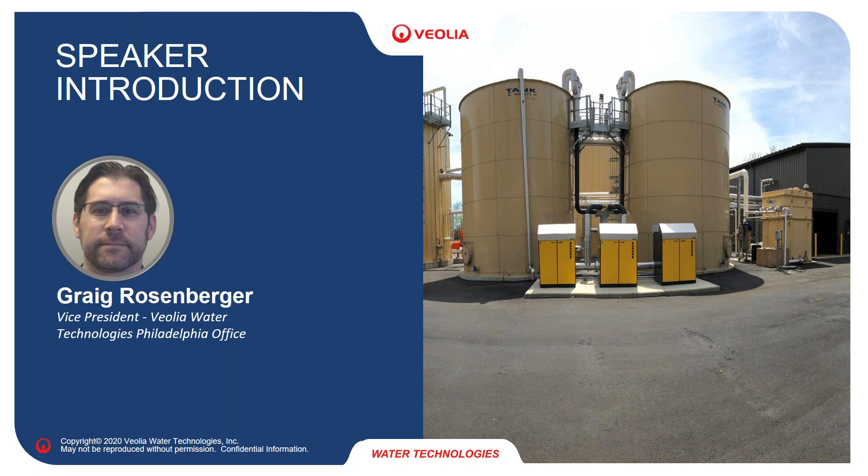Hello, everybody. As TJ mentioned, my name is Graig Rosenberger, and I've been working in the food and beverage industry and the wastewater side for over 20 years, and I'm happy to give this webinar series today from my lovely bedroom, probably like a lot of you guys are at home in your dens or bedrooms, or at the work from home situation going on right now.

From the agenda today, we're going to hit a couple core topics. We'll have a brief look at understanding some food and beverage wastewater, some terms, looking at a little bit of the technology. Then we're going to go into what are some of the key wastewater project drivers that we're seeing out there and why people are actually putting in wastewater projects. We're going to look at different types of technology out there, primary treatment, biological treatment, anaerobic and aerobic systems, membrane technologies. We're going to look at an interesting small evaporator technology for point source treatment.

We're going to look at some case studies. Where are your contemporaries applying these technologies and what do their projects look like? And then we're going to finish up by looking at some things. If you're thinking about a wastewater project, what are some things that you would have to think about, some things you should do to help the technology supplier better provide you with the best solution available.

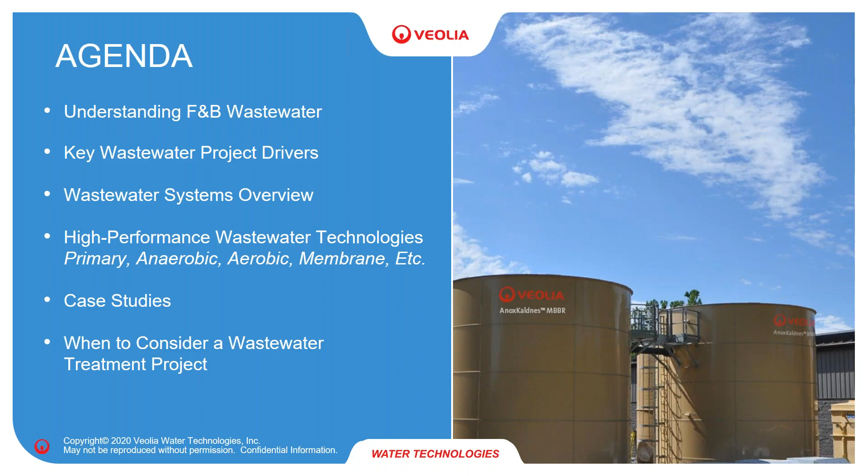To start off, when we look at wastewater treatment, you'll find, if you don't know already, there are a tremendous amount of acronyms and terms that we use out there. We just sort of say them right off the bat, assuming that everybody knows what they are. We found through some of the feedback that sometimes people don't know all these terms that we're throwing around. So we just have a little glossary here to start with. You'll see some of the key terms here that are used all the time.

COD, BOD, being the chemical oxygen or biochemical oxygen demand, really what measures the strength of your wastewater. TSS, total suspended solids, pretty self-explanatory, the solids in your wastewater. You have a lot of different types of technology that all have acronyms. UASB, EGSB are different anaerobic technologies. DAF for dissolved air flotation.

MBR for membrane bioreactors. MBBR, and a lot of people confuse MBR and MBBR, the difference between a membrane bioreactor and a moving bed biofilm reactor. And for a lot of you, especially in the dairy industry or in the meat process industry, FOG: fats, oils, and grease. So here's a couple of the key wastewater terms. We use those a lot in the wastewater industry.

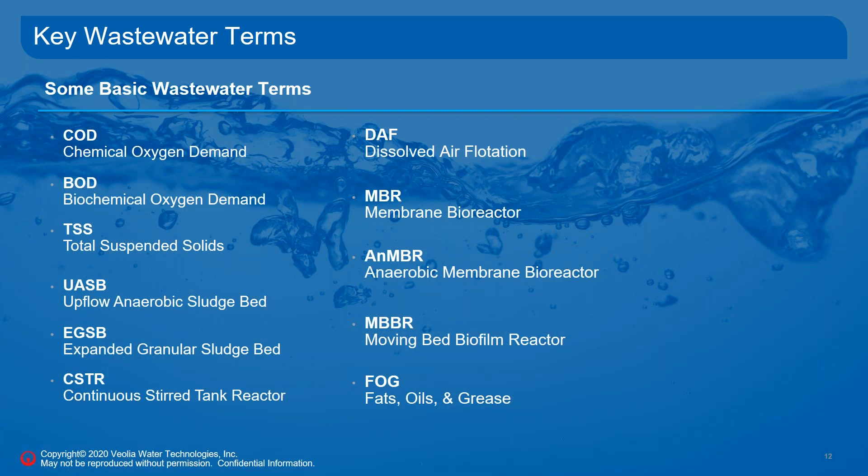When we think about food and beverage wastewater, what does that consist of? A lot of sugars, carbohydrates, fats and greases, proteins, ammonia, other compounds. These are the things that a lot of times are going to be in your raw wastewater that create some of those COD, BOD, TSSs. Some of the unique challenges in the food and beverage industry: pH swings. When you do CIPs, obviously a lot of times you come down with extremely high pHs that need to be understood. Temperature. Are you coming down hot? Are you coming down cold?

Biological wastewater treatment is very dependent on temperature. Anaerobic treatment likes hotter temperatures around body temperature, 98.6, 99 Fahrenheit. Aerobic systems can run at a wider range of temperature. Variability, there's a lot of variability, especially for batch production facilities, in the strength and the flow of the wastewater that comes down. Seasonality, look at some of the vegetable producers, they have huge production in certain parts of the season and very little in other parts of the season.

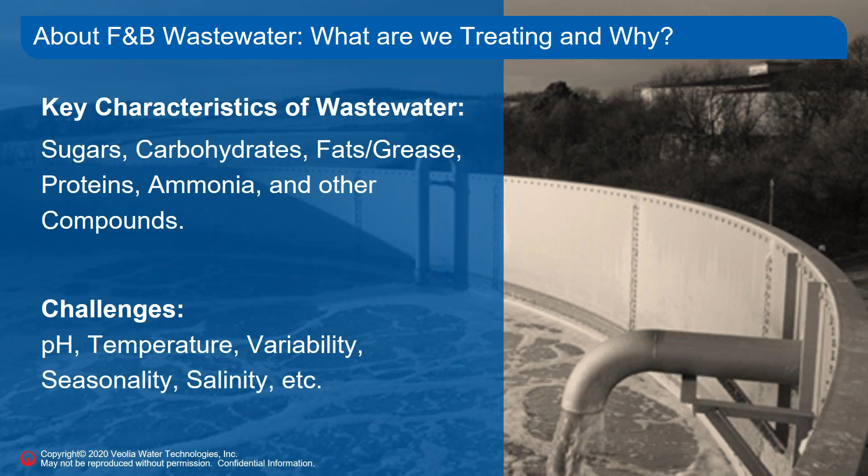Salinity, what is your salt content? What is your chloride content? A lot of times that comes into play when we look at materials of construction. If you have high chlorides, potentially that could make stainless steel an issue. So there's a lot of unique challenges in the food and beverage industry and across different portions of that industry that we have to take into account.

Why do we do this in the end? Why do we treat wastewater? Not to get on the soapbox a little bit, but obviously it needs to be treated because it has an oxygen demand that if you just put it directly into a receiving body, the bacteria would eat that oxygen in the water, and then it would kill the fish. It would cause other detrimental issues.

A lot of N and P eventually go into large bodies, like the Chesapeake or Delaware bays. You could have algae blooms or lake eutrophication around your nutrients. So there's a lot of reasons why we need to treat our wastewater, and there's ever-evolving targets and regulations that need to be hit as those limits become more and more strict over time.

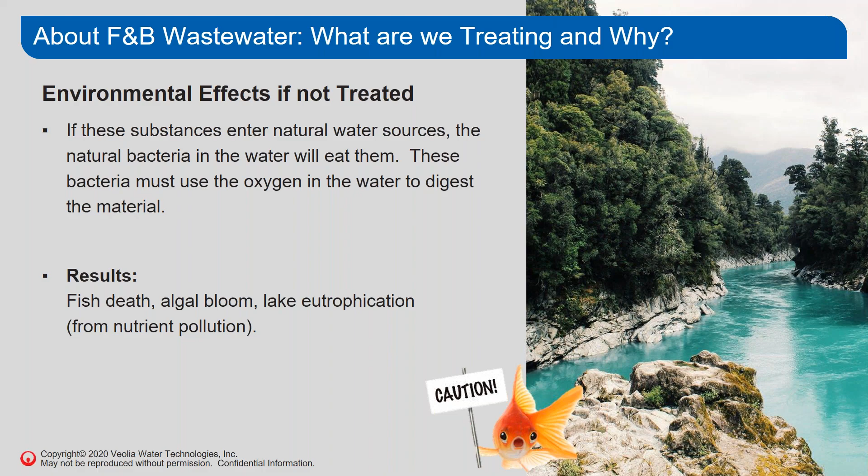So what are some of the key project drivers that drive the food and beverage industry to do projects? I would say number one typically is sewer surcharges and sewer violations, notice of violations. If you're not going direct stream discharge, most food and beverage facilities still put their wastewater into a sewer system. You have to pay money for that. You might have limits for that. So a lot of times the reason people are looking at it is to have an ROI project to reduce your sewer surcharges, or the sewer authority through notice of violations is forcing you to put in a pre-treatment plant.

Corporate sustainability: there's a lot of large firms out there that have corporate sustainability efforts that are requiring some level of pre-treatment before a sewer, or they're looking at water reuse type of situations. Facility expansion is always a big one. You're putting in an expansion project, you're increasing your production capacity by 25, 50, 75%, and the sewer authority or your existing wastewater treatment plant cannot handle it. So you need to include wastewater treatment plant expansion in the total facility expansion.

And another thing is future proofing. There are some clients out there that we are seeing that say, we're going to do a wastewater project, we don't want to do it just for today. We want to put in a project that's going to last 10, 15, 20 years. So we have some more people now looking at, okay, what are my expansion plans over time, recognizing that it might cost a little bit more right now, but to increase the volume of a tank or a pump is very small compared to adding a second whole tank or pump in the future.

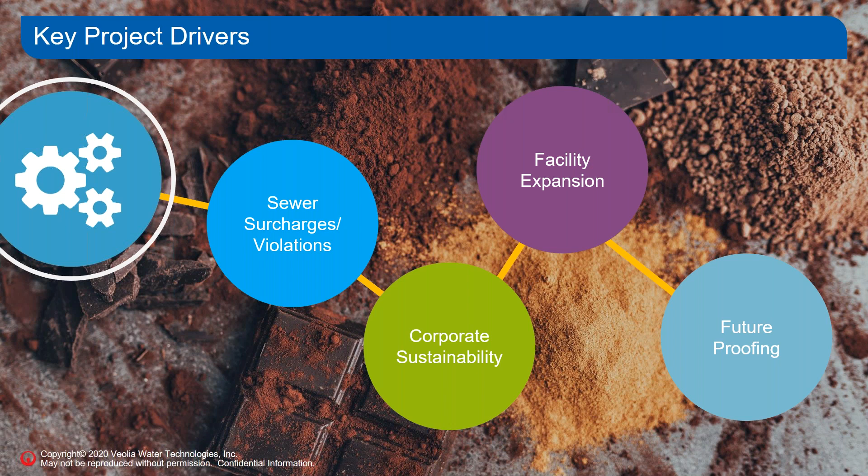So when we look at the first drivers, we're really reducing sewer surcharges. How is that going to happen? What do we look at? What are we looking to do? And most of the time people are paying on TSS, FOG and BOD surcharges. Almost everybody pays on flow, strength of wastewater with BOD, and solids of wastewater with TSS and FOG. So we're looking to reduce that level of pollution, or sometimes even reduce the flow if we can.

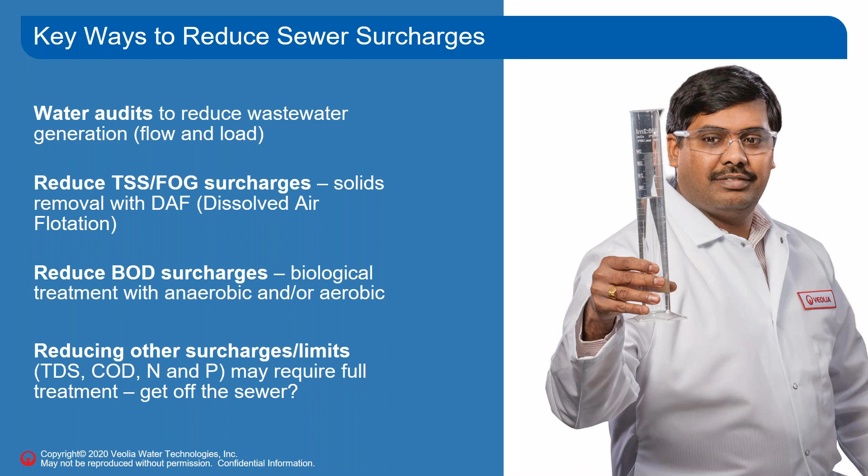And then the secondary one is if you have any nutrients. There's some people out there that do have nitrogen and phosphorus requirements, even some now that are starting to have dissolved solids requirements. How do we reduce those? So when we look at sewer surcharges, you're typically looking at what your sewer bill looks like. What are you being charged on, so we can figure out how much money could be saved. Eventually the accountants get hold of it and want to look at an ROI calculation.

So what technologies do we use to reduce pollution in the wastewater, reduce those CODs, those TSSs, correct for the pH, etc.? So when you look at wastewater treatment, some more terms you'll hear. You typically look at 3 types of treatment. You'll hear about primary treatment, which is typically equalization, pH neutralization. Maybe you could consider FOG or TSS removal, screening. That's what you typically consider primary treatment.

Secondary treatment, typically you start to talk about biological wastewater treatment and large reductions in the BOD or COD of the wastewater. And then you talk about tertiary polishing, sometimes when you need to go to lower levels of phosphorus or lower levels of TSS, or put in even finer screens. And then there's different types of offshoots from that. Sludge handling, if you have a lot of sludge that you can't just truck away.

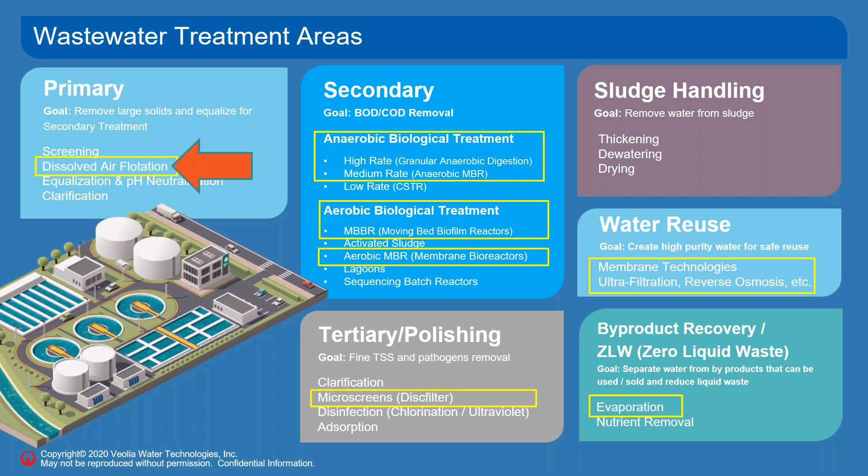Looking at potential water reuse back into a cooling tower, back into the facility. Or even some small plants are looking at zero liquid waste or zero liquid discharge, ZLD type systems. So we're going to start off here with primary treatment. Most people know what equalization and pH is, but if you're looking at dissolved air flotation, that's really around typically FOG and TSS removal.

There's a lot of people that have FOG limits. Typically, maybe that could be 200 ppm, 300 ppm. The sewer authority wants you to reduce that because essentially the FOG goes down the drain, it gets into the pipes, maybe it combines with some cold water somewhere, and you start to create fatbergs, as they're called. If you go online and Google fatberg, you'll see some stuff from London a few years ago. They had fatbergs that were tons and tons large over years and years of time.

So the DAF is a piece of equipment that is used a lot to remove FOG from wastewater and get it down underneath your FOG limit for the sewer. It also has the benefit that all the TSS and all of the BOD associated with that FOG is also removed. It's a technology where you basically inject air into the waste stream. That air, those micro bubbles, float that FOG to the top of the DAF where it is scraped off. And then the clean water in the underflow is your final effluent.

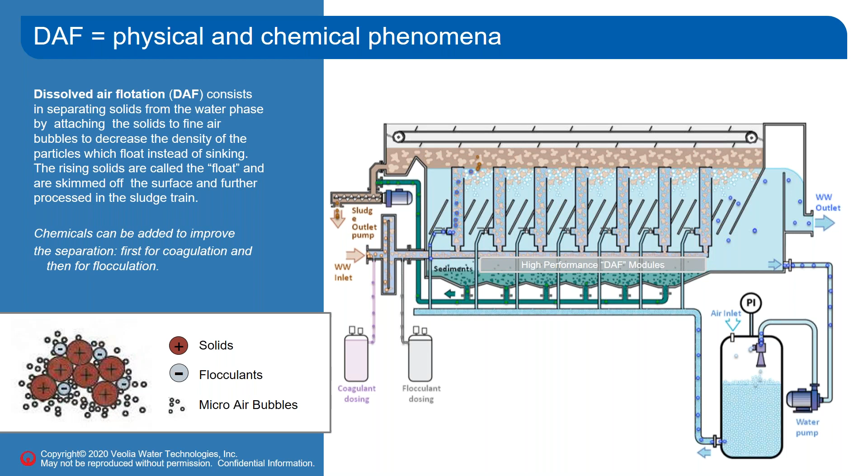Typically, you will use polymer, some type of coagulant, like a ferric chloride, or sometimes another type of polymer, and then a second polymer that will help facilitate that flotation of material. The main advantages you'll see are TSS and FOG removal. With a standard DAF, you would pretty much take 80 to 90% TSS and FOG removal with proper polymer dosing. And this is done, as I said, to prevent a lot of downstream blockages of FOG in downstream sewer piping.

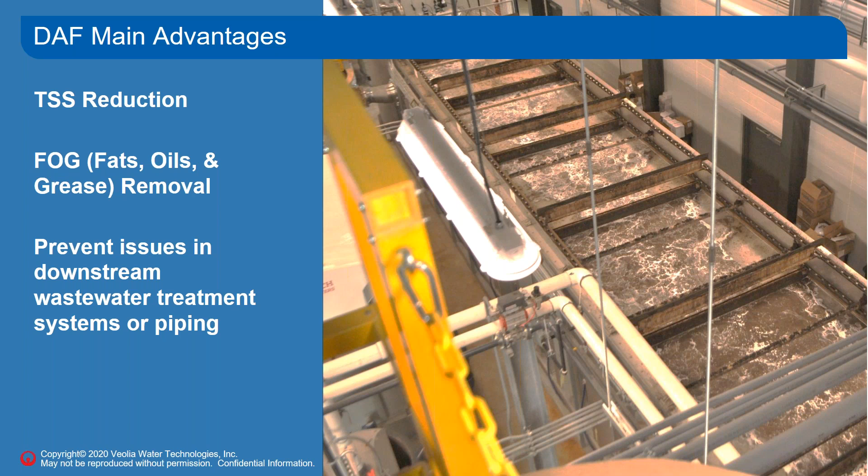If we go now to secondary treatment, there's a couple different types of secondary treatment that we'll look at. We'll start off with my favorite type of treatment, anaerobic wastewater treatment. When you look at anaerobic wastewater treatment, you're typically looking at a couple different types. We call them high rate, medium rate, or low rate. Traditionally in the food and beverage industry, you're talking about high rate and medium rate. Those would be your upflow granular sludge systems, your UASBs and EGSBs. Medium rate is more of your Biobulk CSTR systems.

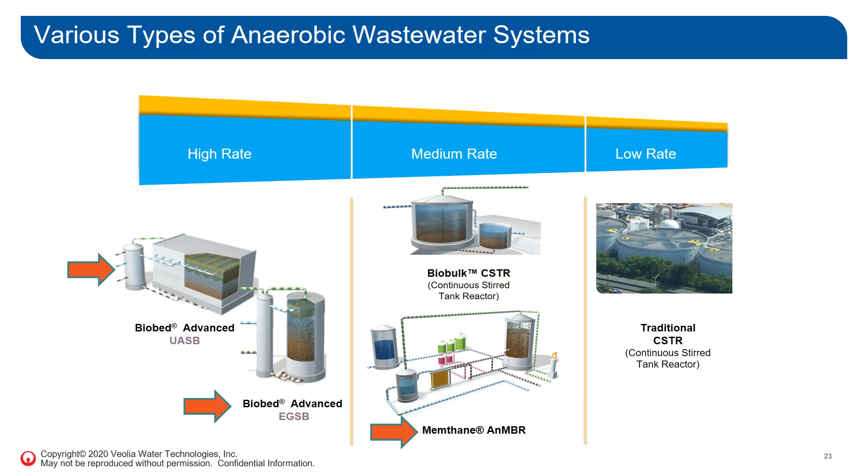The high rate anaerobic technology, granular technology, is a bellwether in food and beverage. Veolia has over 600 of these systems installed worldwide in the food and beverage industry. The UASB system is very common. You'll see it in the dairy industry and the potato industry. And the EGSB system you'll see in most of the other industries. Typically, these types of systems get 80 to 90% BOD removal in a very compact system.

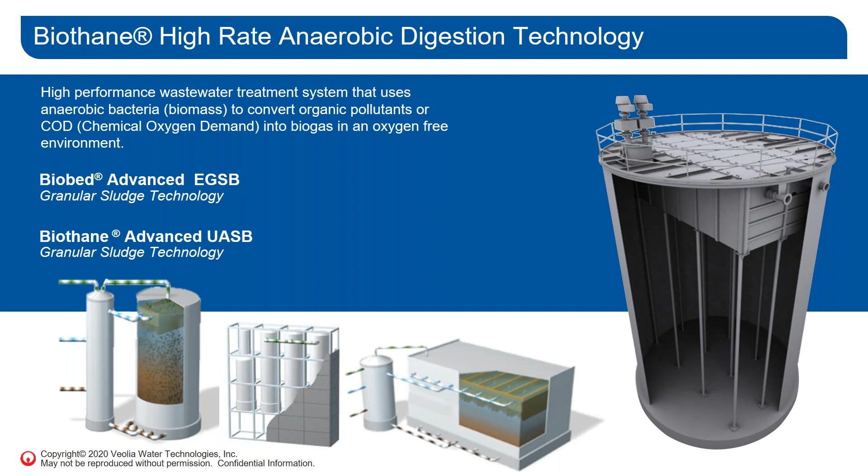They use a granular biomass. It looks like small peas or caviar. You see that initially from a healthy reactor. And the benefit of this system, unlike a lot of aerobic systems where you have a waste product in your sludge produced, is this biomass typically can be sold to other reactors that are starting up or have had problems over time. So you turn a potential liability actually into a product.

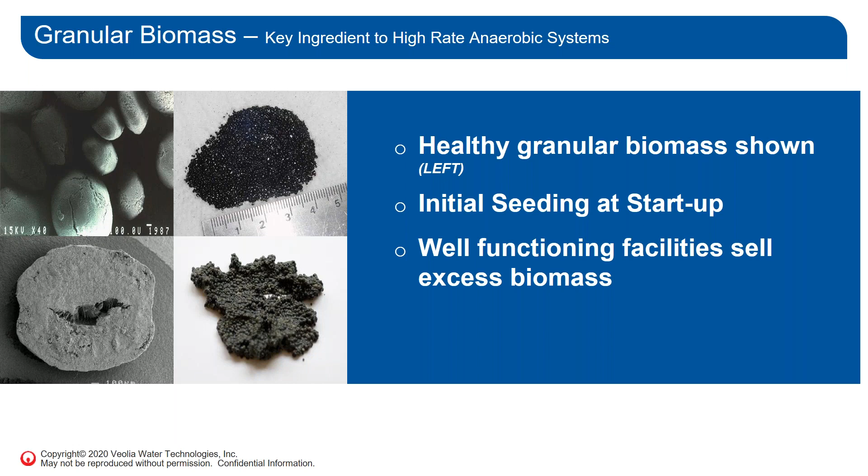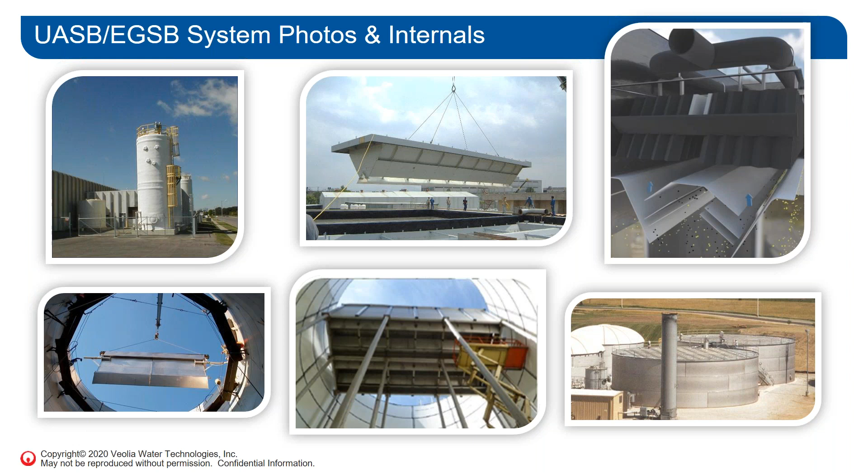The key to the system is the internal separators or three-phase separators. This is where all of the patents and proprietary technology lie for the system. These are shop fabricated to very high quality tolerances, and they are then shipped out to the field and installed in the reactor tank itself.

Another technology out there in the food and beverage industry, especially in the high fat industries, is the Memthane anaerobic MBR technology. The unique part about this technology is it digests fat and TSS. A lot of times if you put a DAF in front, you have fat removal that you have to take into account in your system, having a tanker truck come every couple of days, or depending how large your system is, maybe a few times per day to remove that float. This system actually digests it and then can get that material down to sewer level quality in one step.

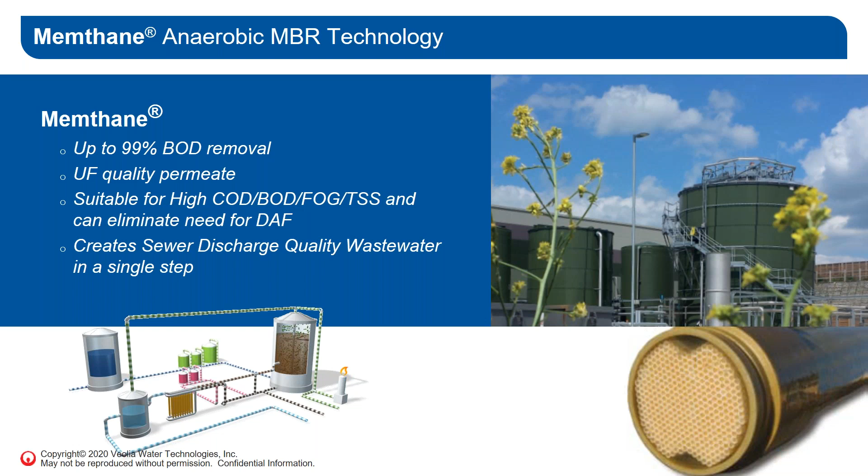Some of the main advantages of anaerobic systems are they have compact designs and sizes. They can be built tall. They run at very high loading rates. So you can get 99% of treatment in a fraction of the footprint that you would need for an aerobic system. They traditionally have much lower operating costs. There are no blowers in the system that need power. And in most instances, biogas is created that can be reused within the production facility to displace natural gas.

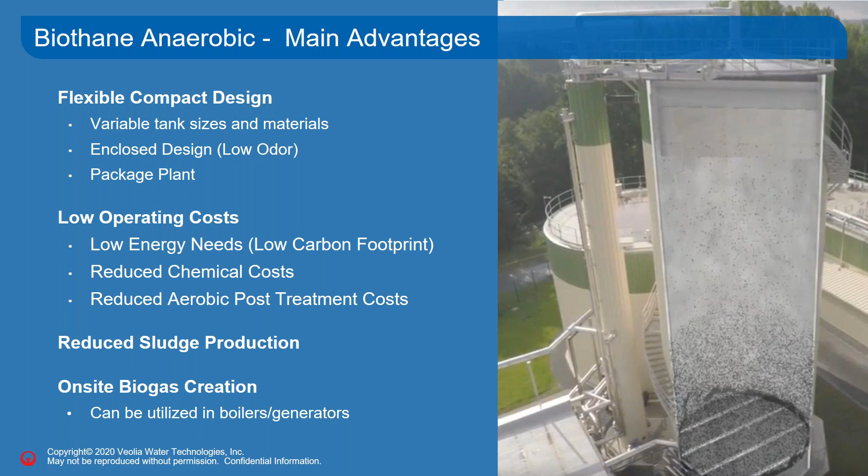And finally, reduced sludge production. In an anaerobic system, only a couple percent of that BOD removal goes to sludge production versus a typical 35 to 50% in an aerobic system. So the amount of sludge that gets produced is much lower. So a lot of operational cost advantages to going with an anaerobic system.

For smaller sized treatment plants, we do have packaged anaerobic systems. These are completely shop fabricated anaerobic reactor tanks. They come with a skid that includes a control panel and the pumping systems. We can shop fabricate the equalization tank. So if you have systems that are smaller in size, a couple 100,000 gallons per day, COD loads that are less than maybe 6 or 7 metric tons of COD per day.

This is a very interesting type of system because it can be built in the shop and installed very quickly. So if you need a fast system out and installed quickly, this one is it. And also, because everything is shop fabricated, it is extremely cost effective.

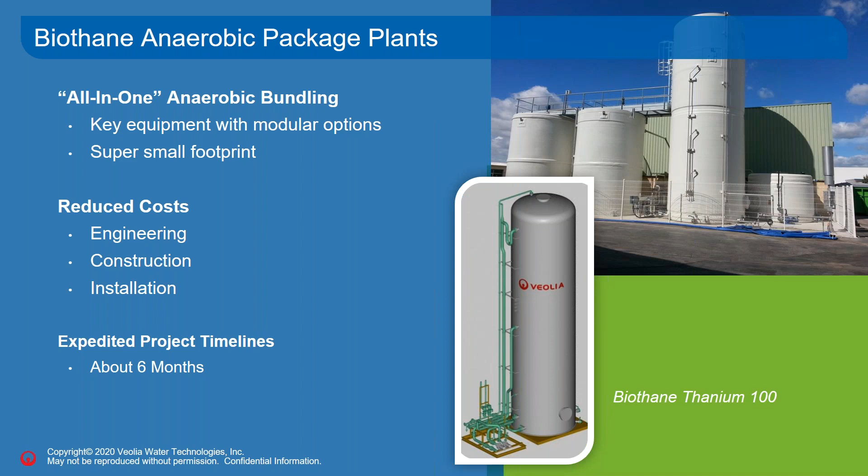If anaerobic treatment is not apropos to your situation because of your influent, or you need very tight tolerances on the sewer discharge, so that you need aerobic biological treatment in back of an anaerobic treatment plant, there's several different ways to do that. First is a conventional activated sludge plant. This is what you see at most municipal facilities. It's been around for a very long time.

Essentially, you have a large aerobic aeration tank where you have your blowers and you blow air up through the wastewater. The aerobic bacteria in there reduce the BOD, COD and TSS in the system. You overflow that into a large gravity clarifier, which basically concentrates the sludge, which you recycle back into the system to keep the sludge concentration in the aerobic system high, and then that clarifier overflow is your effluent.

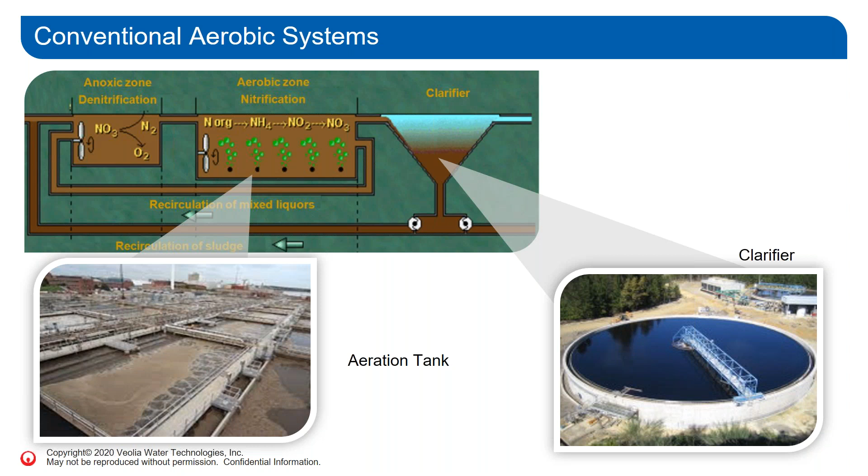And then you have obviously your waste sludge. Whatever you don't recycle back into your aerobic tank is waste sludge that would have to be handled either in a dewatering system or trucked away.

A second type of technology out there, which is much more compact, is the MBBR technology, not to be confused with an MBR technology. MBBR is moving bed biofilm reactor. AnoxKaldnes is the Veolia technology brand name for that. It's been around for nearly 40 years. The interesting thing about this technology is it decouples the clarification from the aerobic system.

So you have a plastic media, it's a biofilm-based technology, as you can see there in your picture. The bacteria actually grow on these small pieces of plastic. So you can load this technology at a much higher loading rate, much smaller footprint, and then you can clarify that with any type of clarifier that fits the system best. It could be a gravity clarifier, a DAF system, or a ballasted clarification system. So it is a more flexible technology in that sense.

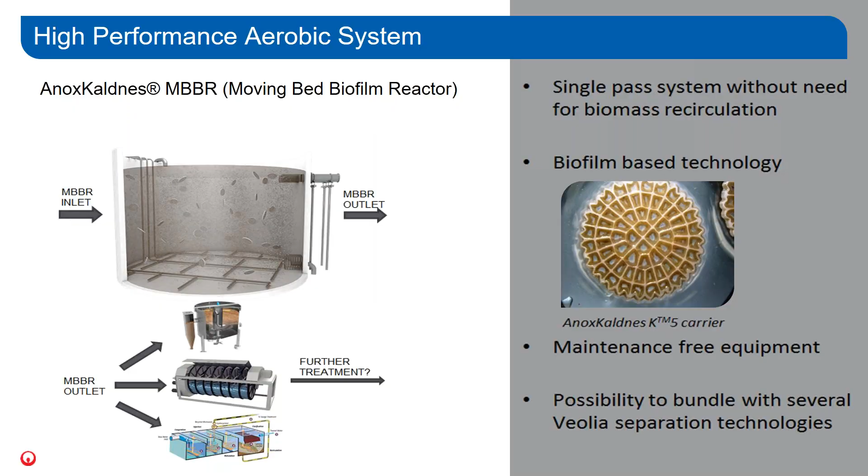The internals to the system are still pretty straightforward. You have an air grid at the bottom of the tank. That air grid is a medium bubble diffuser system. That's one of the advantages with the MBBR. You don't need fine bubble diffusers. You don't have to go in every so many years and change out a whole bunch of discs. It's just a set of metal pipes with holes in it, pretty much.

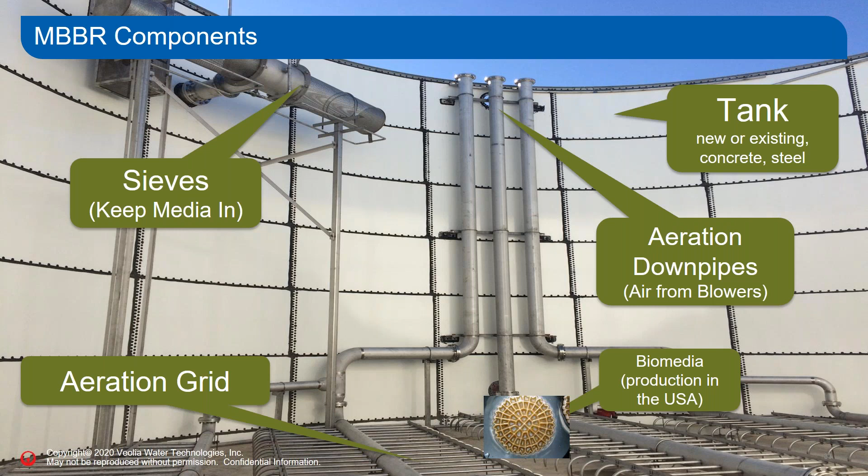You have your media, which is produced up in Wisconsin in the USA. And then you have your sieves. You obviously have media in the tank, and you don't want that media to just overflow out into your downstream piping. So you have some sieves. Really, they're just big cylinders with holes in them to keep the media in the tank. So a pretty straightforward system on the aerobic tank itself.

Here's a picture of the media. It looks like Honeycomb cereal, if you're familiar with that. A lot of technology actually goes into this media to get the proper buoyancy, to get the exact amount of space that you require in between the plastic to make sure you don't grow over everything, so you have the right biofilm thickness, etc. So there's actually a lot of technology that goes into those. They come out to the site in big super sacks that you just dump into the tank.

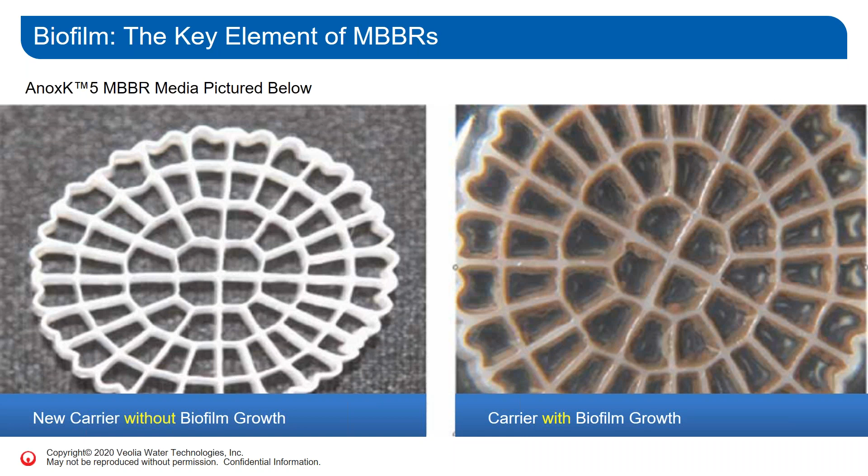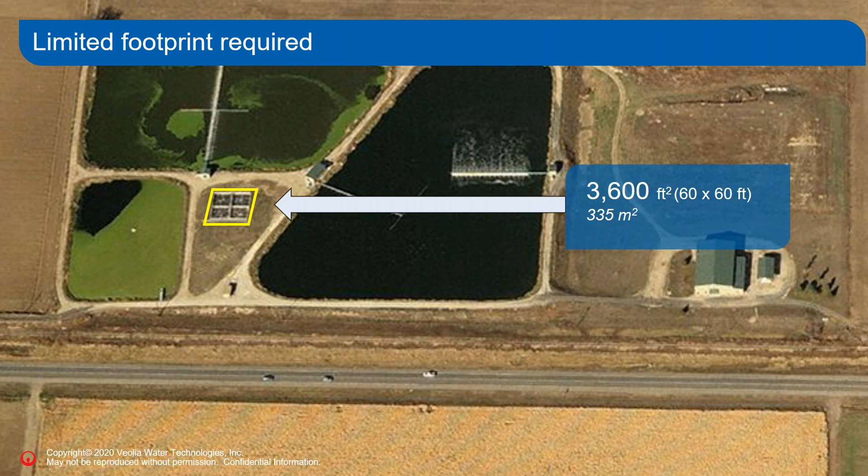Footprint, as I said, is one of the major advantages of this system. It can be run at a very high rate. So if you have a big aerobic lagoon, you can bring this down to a fraction of the size. It is much smaller typically than activated sludge plants too. You can build these tanks a little bit higher as well. So if you have footprint issues, that's a key place that these are installed.

It's also pretty flexible in where you can put it in. In greenfield sites, we can put in an MBBR system as a standalone system. Let's say you have an activated sludge plant already, but your system is overloaded. You can put an MBBR right in front of it just to take off 30, 40, 50% of the load and then just overflow right into your existing activated sludge plant. So it's a real cheap way to gain pre-treatment or to gain expansion into your existing activated sludge plant.

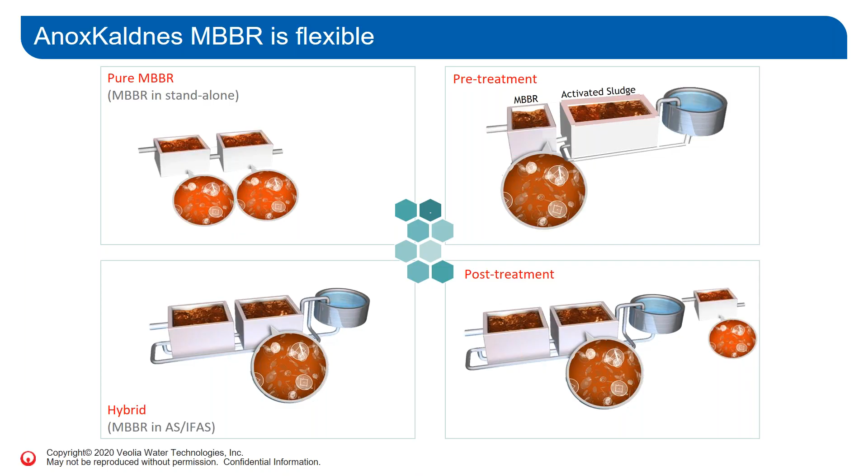Sometimes we can convert your activated sludge plant into an MBBR by just throwing media into the tank, and if you have no room whatsoever, increasing the capacity of your activated sludge plant by installing media in it. And finally, you'll see some people that all of a sudden have ammonia limits put on them. You can take your final effluent and just have a nitrification MBBR that converts all of your ammonia to nitrate. Therefore, you can meet your ammonia limits much cheaper. So it has a lot of flexibility in where we install these types of systems.

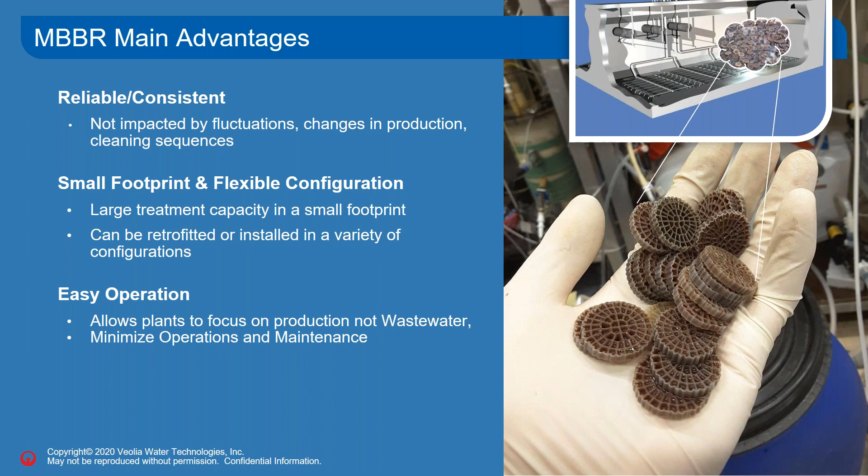The core advantage is it's very reliable because the biofilm grows on the media. So you're not relying on the interaction of a clarifier with an activated sludge plant. So anybody out there that has clarifiers and bulking problems, there is no such thing as a bulking problem in MBBR. Pretty much if the blower is on, then you are treating wastewater. Footprint, as we talked about, it can be loaded very high, so you have footprint considerations. And also, it's very good for systems that need long SRT. It's a very good system for nitrification if you have ammonia issues. So that's another place it's installed a lot.

Next, we're going to look at tertiary filtration. A lot of times people have an existing treatment plant, but their TSS limits need to be lower, or they need to reach direct stream discharge quality, which is always a very high quality standard. Or maybe you're looking at P removal. You have phosphorus issues all of a sudden, and you need to remove phosphorus. This is a technology which can make that happen. It's called a Hydrotech drum filter, a Hydrotech disc filter. They're pretty much the same technology, just how the screen is situated within the tank itself.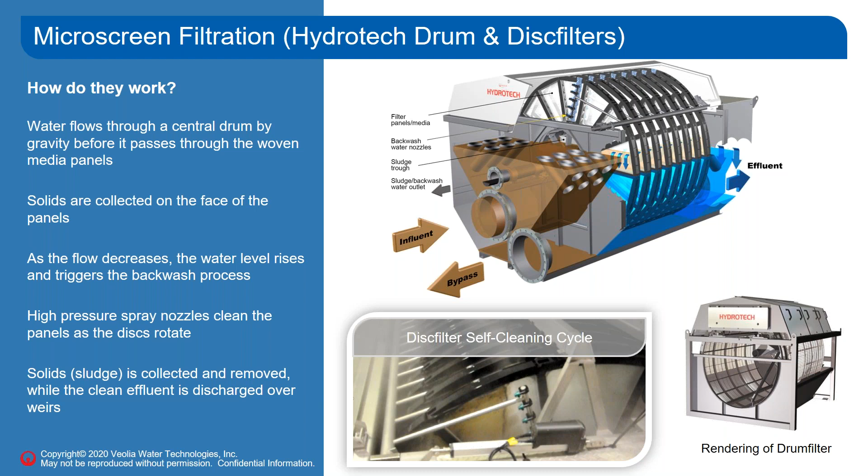They are very small footprint compared to a traditional sand filter. They don't have the complexity of a sand filter operation. They have very low power consumption. All that you have is those discs rotating on a very small motor. Very easy to maintain. You can open that system up while it's in operation. It's all under relatively low pressure. You can replace those discs in situ if they get damaged. You don't need to shut the unit down.

And we see a lot of these used for phosphorus removal. You can have a coagulation tank in front of it and dose some ferric chloride to precipitate out the phosphorus, and then remove the phosphorus in this filter. So it's a very high level tertiary filter that you would install potentially after an existing clarifier. That is its traditional application.

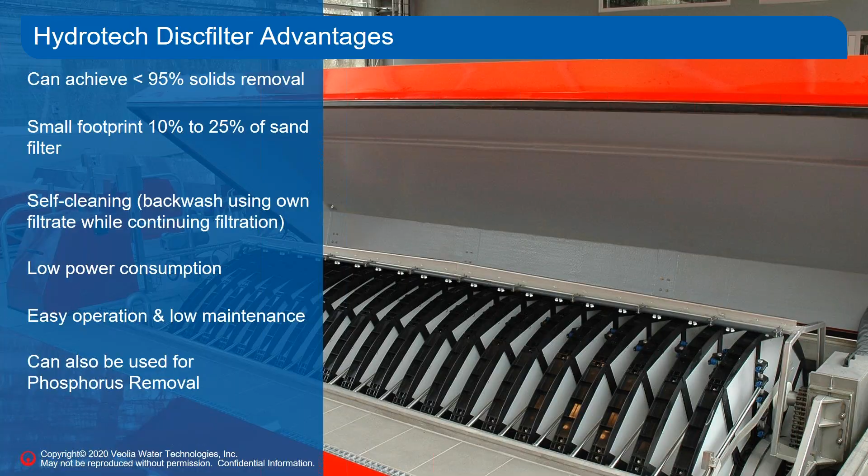Looking at aerobic MBRs, that's another technology you hear a lot about out there. It can meet very high quality standards. So typically you'll see these installed in two situations. One, if we're looking at going to direct stream discharge, because typically direct stream discharge into a river, a stream or a lake requires very low BOD and TSS levels. And two, if you're looking at water reuse, because most water reuse facilities require either very low levels of BOD and TSS, just like direct stream discharge, or they require RO treatment. And in a wastewater application you typically always require UF treatment before RO treatment.

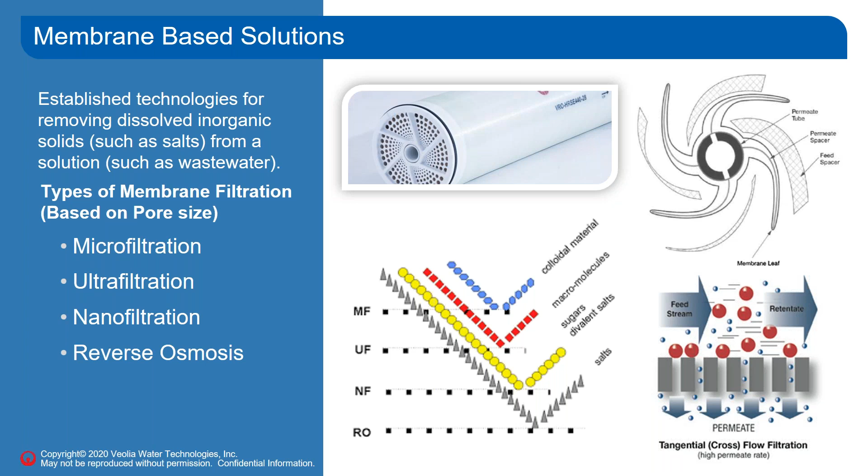So what does that mean? It means you're installing a membrane system as your clarifier. So instead of putting in a gravity clarifier, or potentially a DAF as your clarification device, you are going to install a membrane. Membranes have extremely small pores. They reject all of the TSS that's coming into the system, which can get recycled back to your aerobic plant, and then you will have membrane quality effluent coming out of the facility.

Most membrane systems in a biological environment are submerged membrane systems. They are installed in a tank that actually has the biological contents of the tank in it. You have a slight vacuum on the membrane, which sucks, per se, the clean water through, and the dense sludge then starts to accumulate in that tank and concentrate up.

They can be extremely compact. The membrane systems over the past decade have really increased in their technology and the compactness and how much membrane area is required. So a lot of these times, these tanks can be shop fabricated and sent out to the field and do hundreds of thousands of gallons per day in a shop fabricated system.

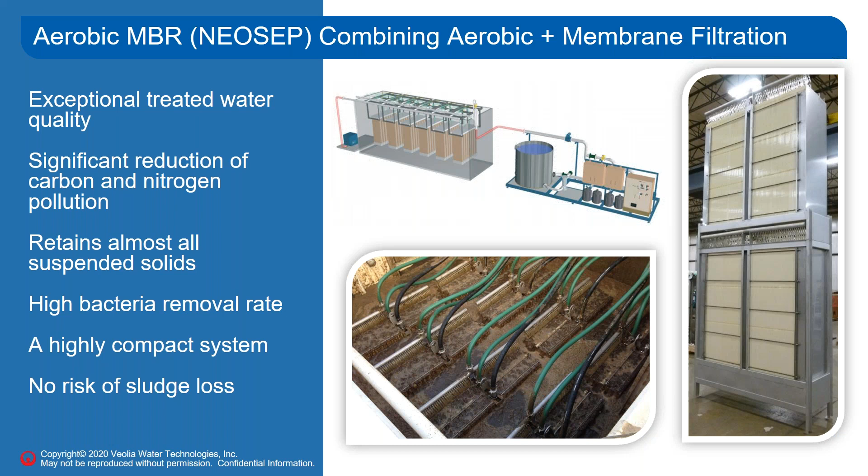If you're looking at water reuse back into your production facility, most times you're going to have to also look at RO technology after your aerobic MBR technology. That RO technology is really for salt removal. TDS, your sodium and your potassium and your chlorides will be removed in bulk using RO technology. You can see this RO technology is a spiral wound technology. It removes pretty much all of the remaining organic material and most of the dissolved inorganic material.

These devices are typically skidded, as you can see here. They can be containerized if you need to put them outside, if you have no space inside. And they would go right after your aerobic MBR plant, or if you already have an existing plant, maybe it's a tubular UF followed by a tubular RO system.

And these systems can be built in any size. These are standard products that go to as low as 20 or 30 gallons per minute and can go up to 600 gallons per minute in one standard skid. They come FAT tested, completely controlled there with a control panel. Pretty straightforward system. So if you're looking at water reuse, you're going to have to probably think about RO to get to the quality level of water you're going to need to recycle back into a food and beverage facility.

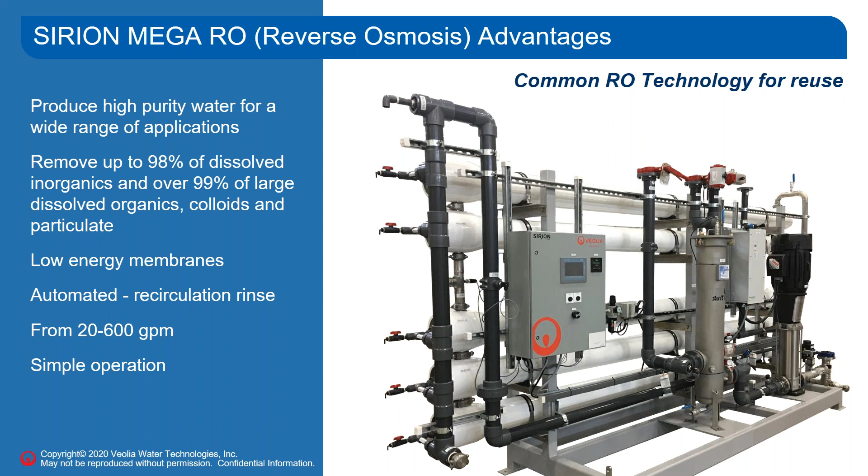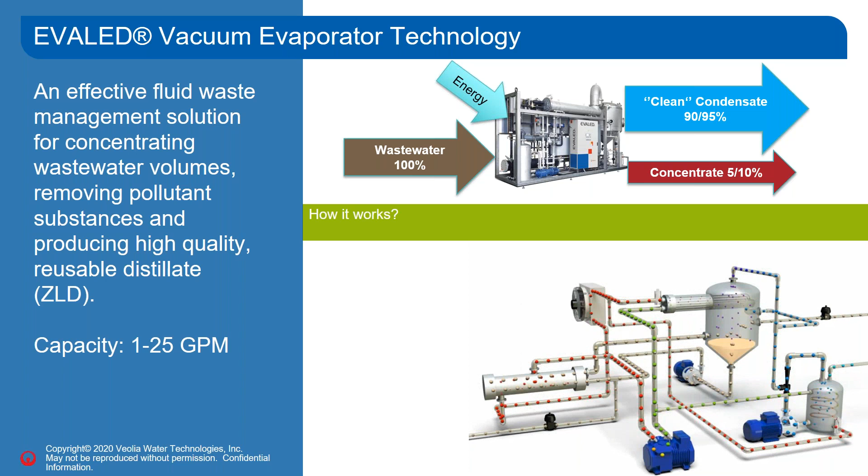Next, we're going to look at an interesting technology which has some niche applications, and that is an evaporator technology. This is a technology which is a concentrator of material. So they are typically on pretty small flow rates, things that are 1 to 10, 15 gallons per minute. And you're looking at typically taking this at point source treatment. You're going back into your facility and finding where you have a very high concentration, low flow that is going down the drain, that you're going to treat before it hits the end of pipe, basically.

It's a completely self-contained, shop fabricated system. It is what a lot of people refer to as a ZLD system. It can be put point source treatment in a food and beverage facility. It can be used to treat brine solutions that come off of an RO system in your plant or an IX system in your plant to treat that brine instead of sending it down the drain. And really what it does is it concentrates things up so you have a concentrate solution that has a much smaller volume. And then you have a condensate which is relatively free of salts.

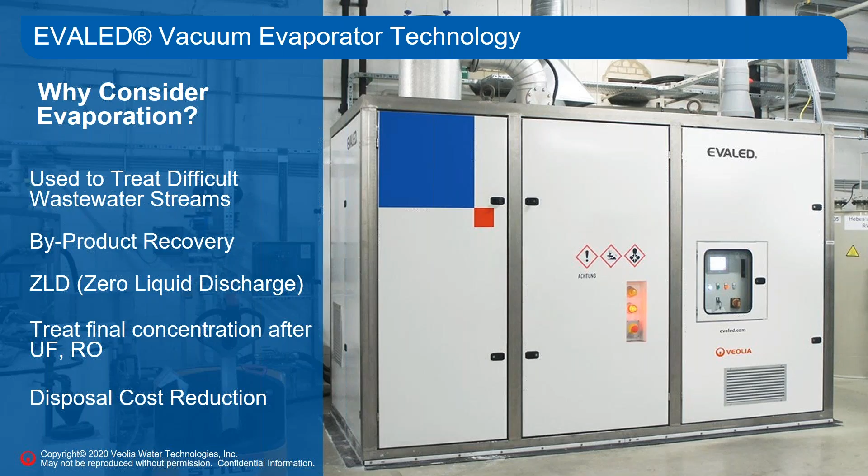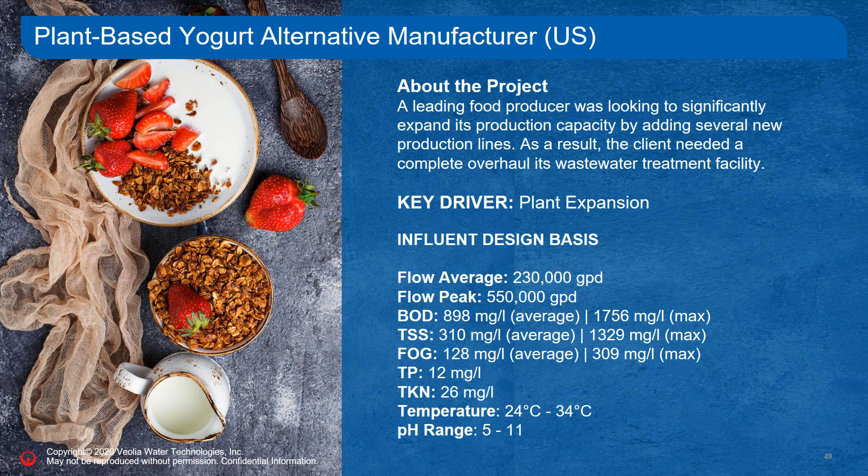So where are people applying some of these types of technologies? First one we're going to look at here is an aerobic plant. This is a U.S. manufacturer of yogurt. You see typical flows here in the food and beverage industry, 200,000, 500,000 gallon peak. As we talked about before, you really got to understand your flows in the food and beverage world. You have average flows and you have peak flows. The system should be designed for both. You can see the BOD average, TSS average, FOG this plant had that we had to deal with. You can see some of the phosphorus and temperatures.

This had to meet a sewer surcharge limit, in order for them to get below the sewer surcharge such that they're just paying on flow. So typically the first step we do is screen the wastewater for any larges, like your nuts and bolts, shrink wrap type of screen. Then we put some equalization in. You always want some level of equalization in your system because you want to size it downstream more for the average, not for the peak. Instantaneous peak is going to increase the size of everything. Piping gets more expensive, pumps get more expensive, tanks get bigger. Typically, we recommend between 12 to 24 hours of equalization depending on your facility.

The next step is through a DAF to remove the FOG. Then it goes into an MBBR system, which is for BOD removal. And then it goes through a Hydrotech filter for final TSS clarification. And as you can see, the final BOD limit there is 300 and TSS is 300.

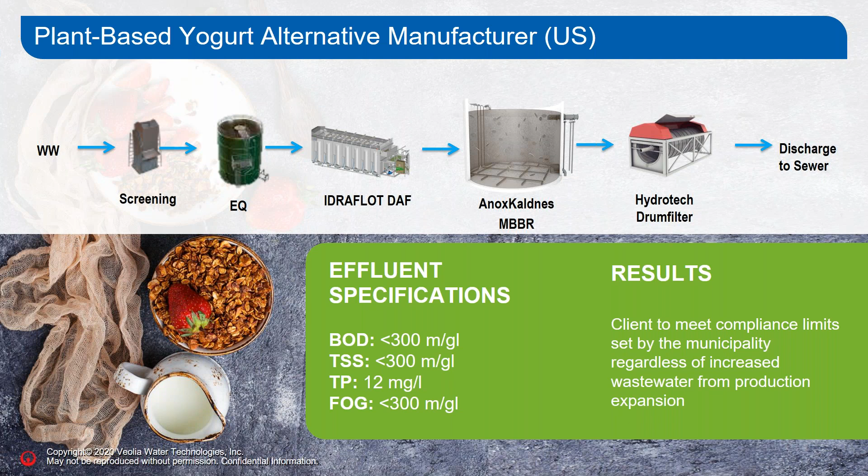Second case study is a large confectionery producer in the United States. Much bigger system, 830 gallons per minute. And they wanted to go to very low levels of treatment, BOD and TSS both less than 10. They needed to remove the ammonia down and phosphorus down. So this system had BOD, TSS, nitrogen, and phosphorus treatment all required.

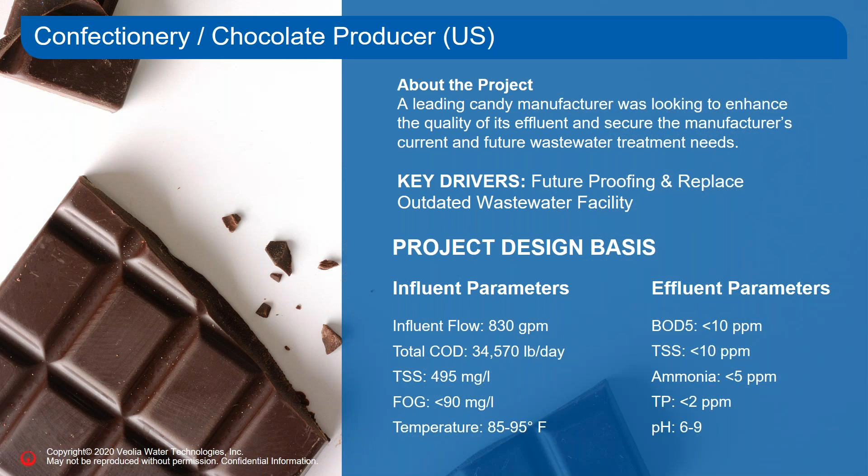We have a lot of different unit processes to get there. Again, your screening and EQ. Most wastewater treatment plants you'll see start with screen and EQ. Then we go into a Biothane UASB, which is your anaerobic digester. That's going to remove about 85 to 90% of the BOD in the system. This facility takes that biogas, cleans it in an H2S scrubbing system, and then burns it in a generator, which basically makes power to self-power the wastewater treatment plant.

After the UASB, the water is not clean enough to meet the discharge quality. So we go through a two-stage MBBR. The first stage is for BOD removal, and the second stage is for ammonia removal. So stage one takes the BOD down to a very low value. Stage two takes all the ammonia and nitrifies it into nitrate to take that ammonia limit down to where it needs to be. Then we do gross clarification with the DAF.

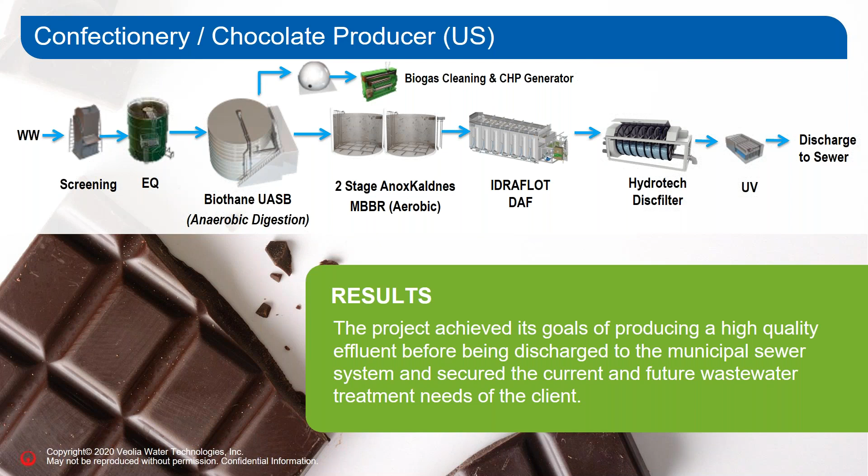Third facility, this is a high FOG facility. This is a snack producer that makes beef jerky. If you're familiar with the company that has beef jerky with the famous brand with the Yeti or the Sasquatch, that is this company. They have a facility which has about 50 to 60,000 gallons per day, 100,000 gallons per day peak. And since it does meat processing, it has a lot of FOG in it.

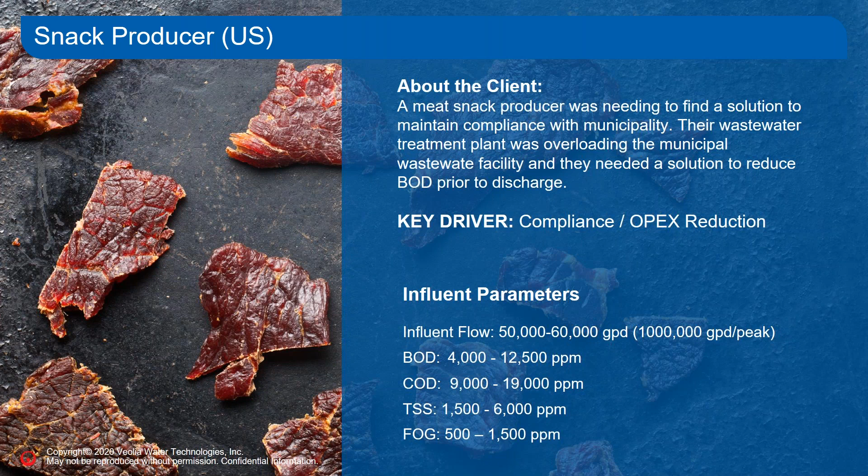And they did not want to have a DAF in front of the system because they did not want to have to handle high levels of FOG. They did not want to have to deal with FOG removal through a truck on a daily basis. They're in a cold weather climate in the wintertime. They can have issues with getting snowed in and not having a truck be able to make it there. So they said, we want to digest that FOG, not have to deal with float removal. So we installed an anaerobic membrane MBR. The advantage of this is we could digest their FOG, taking their FOG down to essentially 0, and meet their sewer discharge quality of less than 200 all in one treatment technology.

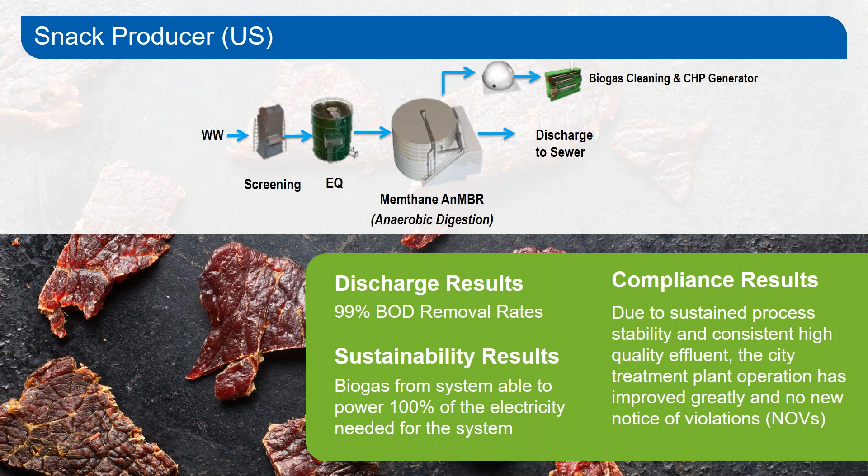If you were not going to do it this way, you would look at a DAF followed by an anaerobic system, followed by an aerobic system. So you would have had really a 3-part system. This gets it all done in one technology step. So it is a CSTR followed by membranes. As you can see here, they also took the gas and ran it through a sulfur scrubber and again, put it through a generator to self-power their facility. So if you're looking at taking FOG and not just wanting to remove it with a DAF, but digest it, this is the type of technology that you would look at.

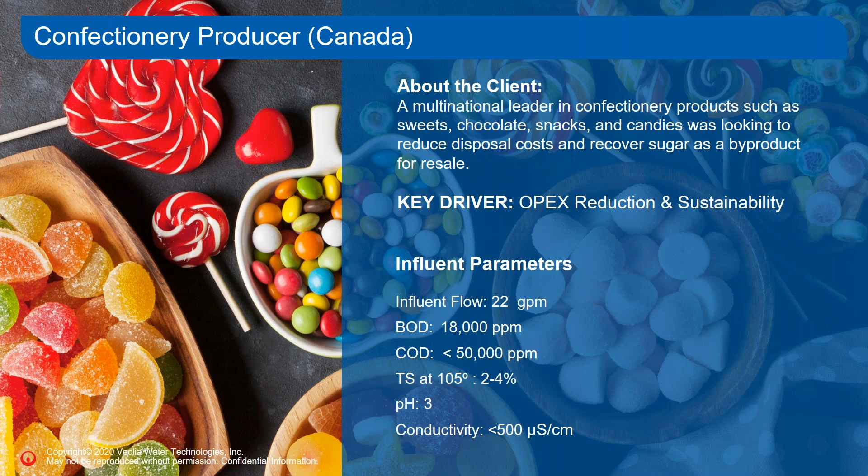Finally, we have a facility here where they installed a point source evaporator. This is a candy maker in Canada. As you can see, the flow is pretty low, about 20 gallons per minute. This is a side stream that they have in their production facility. This is not an end-of-pipe facility. They have a place in their plant where they found out a bulk of their BOD came from. So it's very low flow, but very high concentration.

So they went into the facility. They source separated that one unique stream and they ran it through an evaporator. And the interesting thing here is after that evaporator, they have a distillate, which just goes down the drain. It contains very little BOD. And then they have their concentrate, which you can see we concentrated it up about 90%.

And the interesting thing about that, since it's a food and beverage facility and it's been concentrated and it's been heat treated, they can sell that as animal feed. So you took a waste product that you were sending down the drain, paying large amounts of money in sewer surcharges or large amounts of money maybe in power in an aerobic plant, and they turned it into a valuable animal feed. So you turned a waste discharge into a profit maker. So that's how the economics of this plant were made to happen.

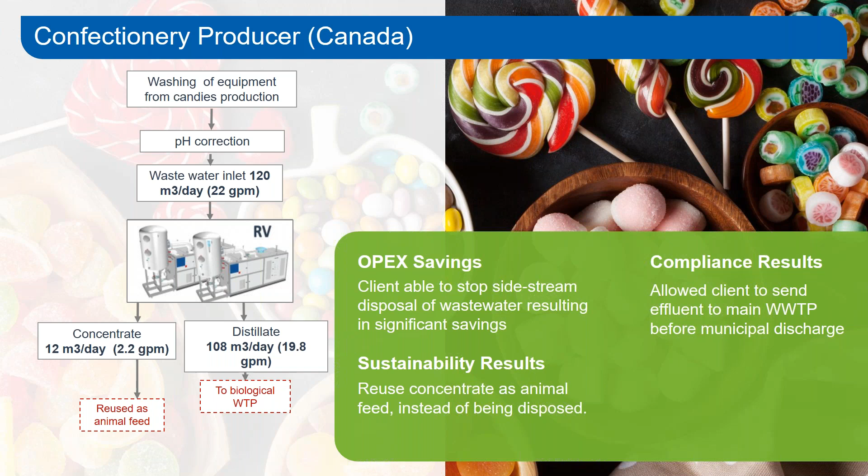So as we sort of round the finish line here, I'm thinking to myself, I might have a wastewater treatment project. What should I be looking at? What should I be thinking about? So who are the people out there that come to us with projects? One, where's your sewer surcharge? What are your fees? People come to us and say they're paying a couple $1,000s a month. It's tough to make a project go forward.

But if you're paying high sewer surcharges, you could look at a pre-treatment to get yourself underneath that limit of maybe 200, 300. Or do you have an existing treatment plant that has very high operational costs? Maybe you can have an anaerobic pre-treatment step that'll greatly reduce your power costs of your blowers, or will greatly reduce the sludge hauling costs that you have.

Here's a big one. Are you getting NOV'd? Are you getting that little nasty piece of paper from the local sewer authority saying that you have a notice of violation? Your name maybe is in the paper. You're having difficulty maintaining your compliance. That's a reason why you might look at a wastewater treatment plant expansion or an upgrade to your existing facility.

Is your municipality or your sewer authority, or maybe even your direct stream discharge, do you know of new limits coming down? Are you hearing rumblings that they're going to all of a sudden put a nitrogen or a phosphorus discharge limit on you? Or maybe they're going to take your BOD or TSS limits down. A lot of times it's better to get out in front of this a little bit than wait to have them tell you what to do.

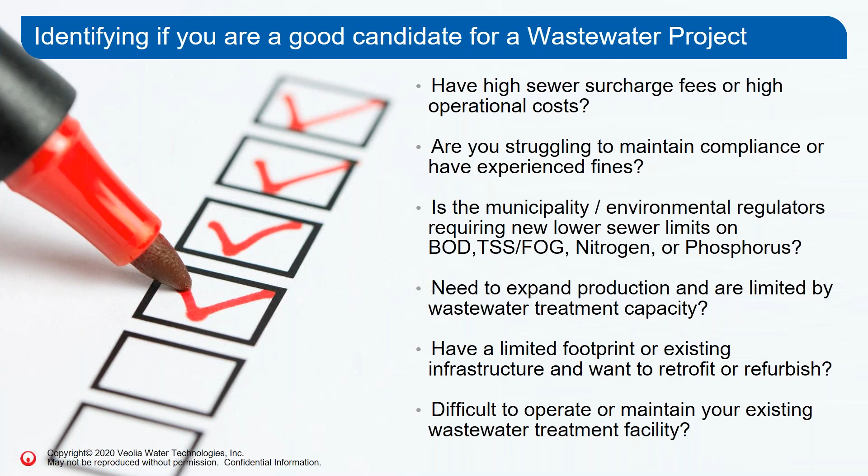Are you having difficulty operating your plant? Maybe your plant just needs some upgrades to make it much easier to operate, so your operators don't have to come in at all hours on nights and weekends, or you're not constantly battling as a manager the problems down at the wastewater treatment plant, which are taking you away from your core business of making product.

So what do you do? Well, simple thing is you call Veolia. That's what we do for a living. Our whole office in Philadelphia is about treating wastewater in the food and beverage industry. We've been doing it for 40 years. We have a lot of skilled people that can talk to you, have a planning level call, identify what the drivers are, what are your short-term goals, what are your long-term goals, what data do you have, what data do you need to collect? What are your sewer bills? What are your operational costs?

In the end, what we can do typically is try to figure out if there's something there pretty quickly. We make money off of projects. We don't make money billing hours, trying to explain to you things that maybe you don't need. We like to look at things very quickly with our experience and say, hey, you know what? You think your sewer surcharge bill is pretty high, but in the end, if you want an ROI of 2 or 3 years, that means you only have a couple $100,000 to spend. And realistically speaking, you can't install a wastewater treatment plant for a couple $100,000. Or you have an existing treatment plant there and say, hey, you know what?

You don't need a whole expansion. If you just turn this way and you added this widget here, we can probably upgrade your existing treatment plant for a whole lot less money than a new one. And we can do that pretty fast.

So we also aren't just technology suppliers where we sell you a widget. We are excellent in understanding design bases and understanding existing wastewater treatment plants and looking at different technologies, as an anaerobic technology, as an aerobic technology, as a DAF only. Do you want to digest your sludge or your float, or are you just okay with an operational cost? So we can give you a lot of different options from our technology toolbox in order to bring to bear what is the best project for your production facility. So we do all of that on a daily basis.